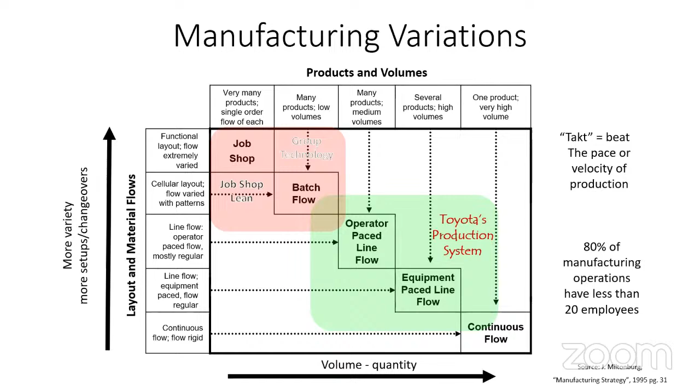Now, the other thing I want people to realize is the concept of flow actually has a fairly long history, several hundred years, actually. And in the beginning, we begin to do rationalization, where you work on trying to smooth the flow or simplify the process of individual processes. And over time, they begin to think about the whole factory as a machine itself.

And even recently, you think about Tesla as being kind of an innovator, especially even in their car manufacturing. And there's a nice little video of Elon Musk talking, and it's like 4 or 5 years ago when they were doing the Model 3 production, and he called it his production hell, where he was sleeping on the shop floor,

and he had kind of an epiphany about the difficulty of basically creating the machine that makes the machine, but he saw the possibilities of improvement, or the opportunity was just so much greater, and he was thinking that his capability was maybe in the 2 to 3% range of what was possible.

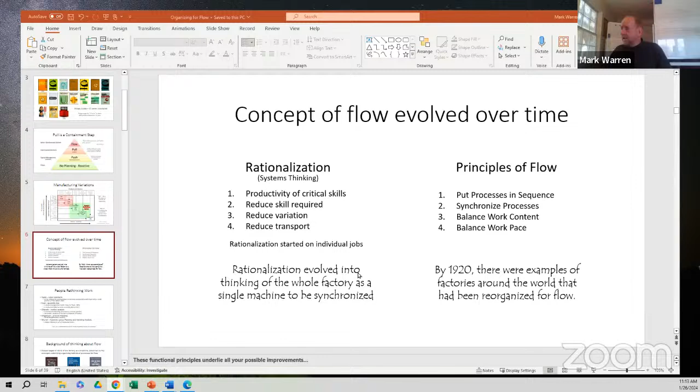There's always one, isn't there? Okay, let me just try to get that muted. Yeah, mute all except Mark. Hey, Mark, you're muted. Can you unmute your microphone? Trying to get Mark unmuted. Are you good, Mark? Great. Everybody else is muted. Can you see there how to unmute yourself? Yep. I can hear you. Right. That's good. Can everybody hear me? Okay. Yeah. Okay. So go back to the presentation mode.

So by the turn of the century, people begin to understand about flow, and there are 4 primary principles of flow, and everything in lean, everything you do toward creating flow follows one of these principles or all of the principles. So that can be a whole discussion altogether.

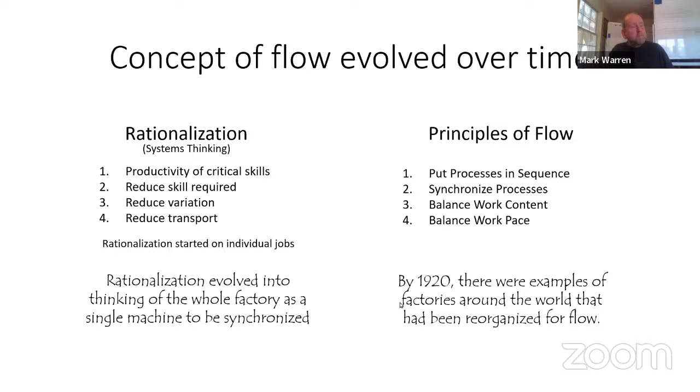But I think people want more than just philosophy. Yeah, we do. Give us some non-philosophy. We like some, but not too much, Mark. Okay.

So the other piece would be, and I'm thinking about the things that I read about Shingo and Ohno, and they talked about there was a time in their practice of work that they had kind of an epiphany, they started thinking about work differently. And not only they started thinking about work differently, but the people that they drew on to copy also had this same sort of epiphany.

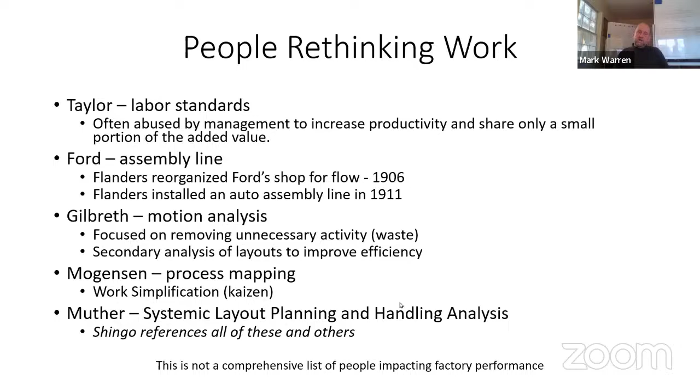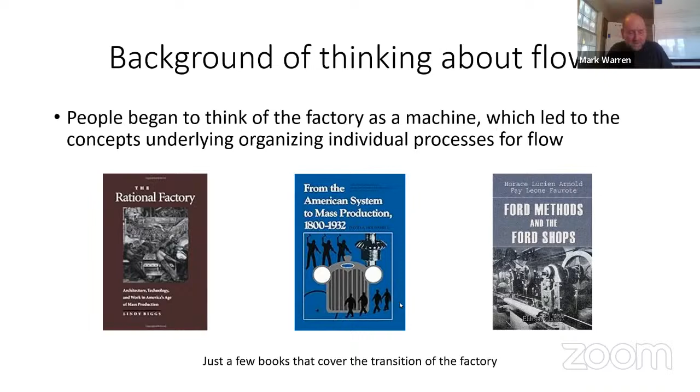And I think a lot of people, when you transition into like the 2-second lean and like your improvement starts with I, it really requires you to make a thinking change about how you do things. And if anybody wants a list of stuff about some of the history about some of this thinking, here's a list of books. I can skip over that. Just send me a note. Now, the interesting piece is I want to try to kill the one-piece flow moniker.

I've fought against it for 20 years, and finally, because I've gotten into all of Shingo's books and realized kind of where the source is and his discussions, we only have a little piece of the story behind it. It's not just one piece as an ideal for the flow part. Also, he wanted transportation to be 0. He wanted the cycle time to get as close to 0. He wanted delay, like the intermediate stock, to be 0.

He wanted work in process to be as close to 1 as possible, or as close to 1 as effective given the processes. And the critical piece was synchronization. And he talks about getting rid of the delays. And he calls delays stagnation, which makes you think of things differently. And by the way, the inspection cycle, like his zero QC, you want the inspection of the poka-yoke to be inside the value adding time as much as possible. So he talks a lot about thinking about space and time.

So Mark, I'll play the dumb guy, it's easy for me. So one-piece flow, you're saying here that it's got overemphasized over all the other goals that he had. So people obsess about one-piece flow, we've all seen it, and he had these multiple goals.

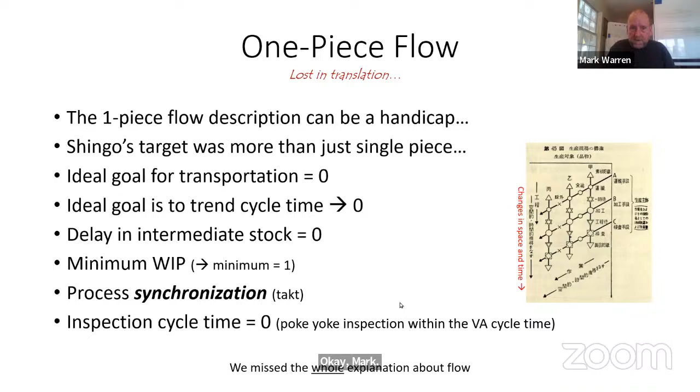So the next thing I want people to think about is there are levels of granularity. It's not only levels of granularity, but iterative. So I want to start out looking at a fairly high level and then work my way down. This one I was using as an example in a company I was working with in Asia.

Mark, I'm going to ask you to go back a step. Again, I'm doing this in the spirit of giving everybody a rounded understanding. So most of us on the call are 2-second lean people from our emphasis.

This is really what I'm getting from that slide, is that the systems thinking is at the other end of that. This is where we're looking at the whole system, and we have different views, where most of us are down at the very essence of 2-second lean in itself. And if it's dogmatically applied, you're looking at smaller ways, many subsystem, little improvements in 2 seconds, whereas this is the whole spectrum.

Yep. So I want you to kind of look at a high level and then work your way down. You can basically spend a ton of time making all these little improvements. It may fix what bugs you, may not, but the other piece is, since most of the people are probably working with smaller companies, and I can give you some statistics, in the US, 80% of manufacturing operations have less than 20 people. In Europe, it's like 90% have less than 20 people.

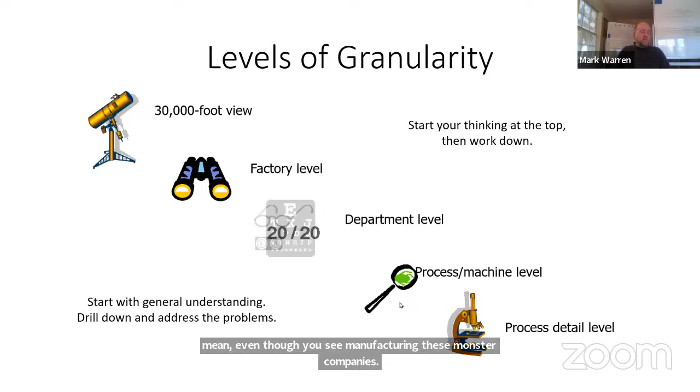Even though you see manufacturing of these monster companies, what do the small shops do? Well, you can use some of the tools that Toyota used, but it's not as effective as you think. Mhm. It's really difficult. Okay. This is super interesting.

Okay. So I want you to think about, you need to get into your mind, at a high level, from your supplier, inside your factory and then your customers. I want you to look at, what are the barriers? And I'll get into that a little bit as well, but you can look at the high level, and then we can keep going down.

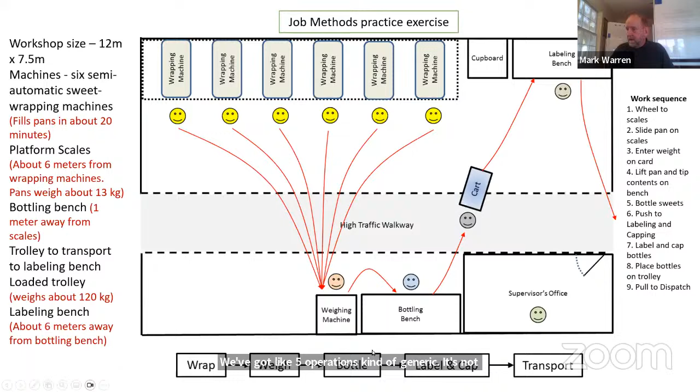So ideally, what you want to do is in your very first pass, well, let me go back up. Just like this, we've got like 5 operations, kind of generic. It's not detailed, it's just generic. We want to dig down. So which one's problematic? And I'm going to tell you, if you can't clearly see, or if you bring a visitor in and they cannot clearly see what the sequence is, it's so disorganized, then yeah, you really need to do a lot of 4S'ing.

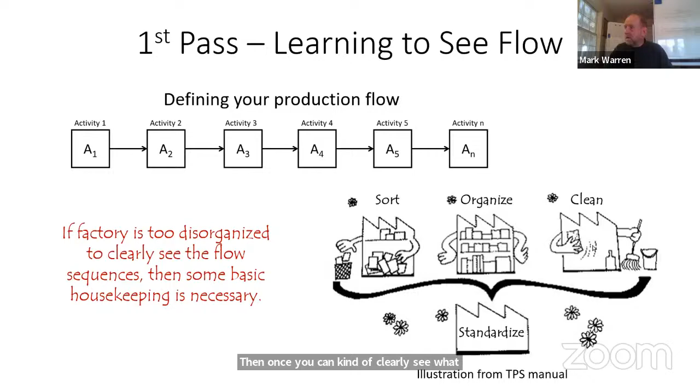And actually the 4S came out of the job methods in TWI, is you need to get organized a little bit, just enough to basically get your act together. But once you can kind of clearly see what the sequence is, and maybe you do a little bit of moving around, I want you to go back and walk through those same pieces and list all of the problems that you have. What kind of activity, what kind of rework, machine malfunctions, bottlenecks. Once you identify your barriers, these disruptions are what actually eats up more time.

And one of the observations I just stumbled on the other night, I was reading some of Shingo's stuff, is he talked about the improvements, that you gain more from removing the barriers than you did from actually fixing a process. Can you dive into that a bit more? You get more from removing the barriers than fixing the process. Okay. So, well, maybe I need to retract the fixing the process. So if I have a high rework rate, yeah. I actually think I get you.

So if you've got a part of your process that's giving you 10% reject, that's a barrier. Taking that barrier out, automatically your throughput's going up at least 10% because you've got rid of that. So it's an easy place to focus. Yep. And sometimes I've gone into places with high volume automatic machinery, you'll have the machine at a fairly rapid cycle time, and the machine will cycle and there won't be a product in there. So you have missed cycle times.

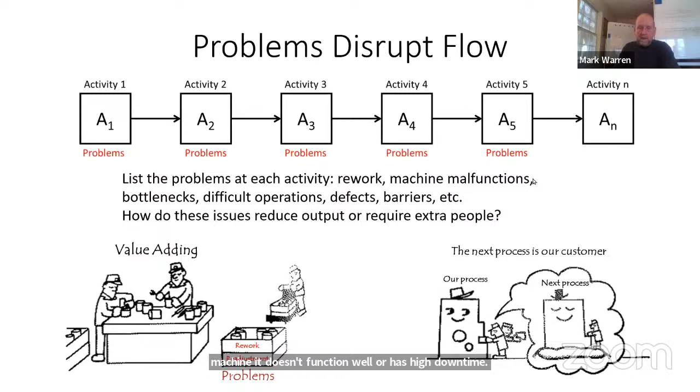The next piece is I start looking at unnecessary activities. A lot of people think about waste, and I'll give a little thing. Originally there were only 4 wastes listed. It was much later in the process that they got up to 7 wastes, but originally it was only 4. And he quantified them because people were having a difficult time identifying true disruptions that could be fixed. A waste is really an unnecessary activity that we're doing that we want to remove. And so that's our goal, to try to remove the unnecessary activity.

They've used this illustration several times. A lot of times I'll ask people, how many times do you touch it? How many times do you pick it up, put it down, pick it up, put it down? One of the pieces inside flow is I would pick 2 processes to start with that have about the same rate, and I want to make sure those machines are as close together as possible. The operator, as soon as they finish that operation, sets it down or puts it into the fixture for the next operator. So you're beginning to synchronize 2 operations, so you don't touch it numbers of times.

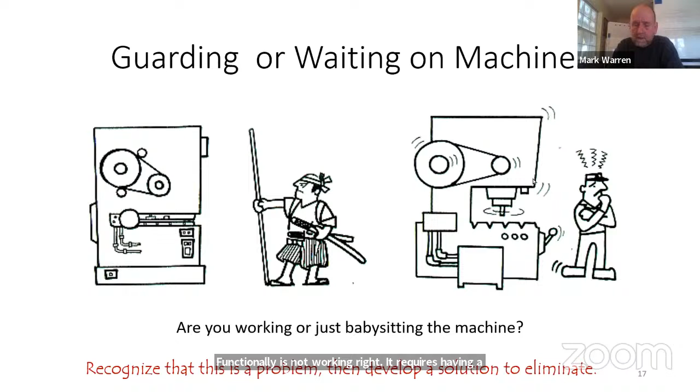So once I've got the process sequence, then I want to talk about velocity. And I want to challenge you, please don't try to do time studies. Don't get out a stopwatch. The first pass, go ask your operators. It depends on your product: so many pounds per hour, so many pieces per hour, so many pieces per day. But what you want is just an approximate value.

And the reason I don't want you to get out a stopwatch, there are some psychological reasons; people feel like you're challenging them. But you want to be doing the improvements so rapidly. In the early phases, you can do improvements so rapidly that you're wasting your time trying to document an accurate time study.

If it's a fairly short cycle time, go out there and get your watch out if you want, and just count, like, 10 pieces. How long does it take? Well, it takes about this. And as you're observing those 10 pieces, do some seem to take longer than others? That makes you go iteratively back into problem solving. Why is one taking much longer than another?

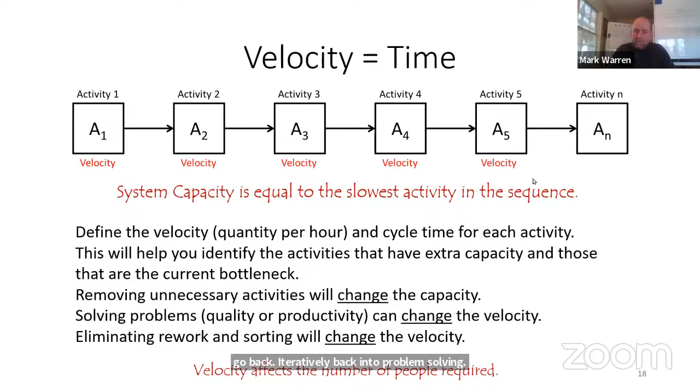So here's an example I had from when I was doing a project over in Asia with some IE students at a company.

I had them go out and do the same thing. Follow 10 pieces, tell me how many pieces per hour is the capacity of that particular station on the line. And they came back and they were like, okay, so this one can do, I can't quite read how many, 100 per hour. And we put the target, basically the takt rate was this, the little dotted line. I'm not sure if you can see this or not.

Yeah, we can. We could say, okay, so what are we going to focus on? And it became really obvious that I had overcapacity here, overcapacity there. Here's a couple that are under capacity, that one. So I've got 3 that are under capacity. So once I do that, I've identified those 3 are basically my bottleneck or weak spots of meeting production demand.

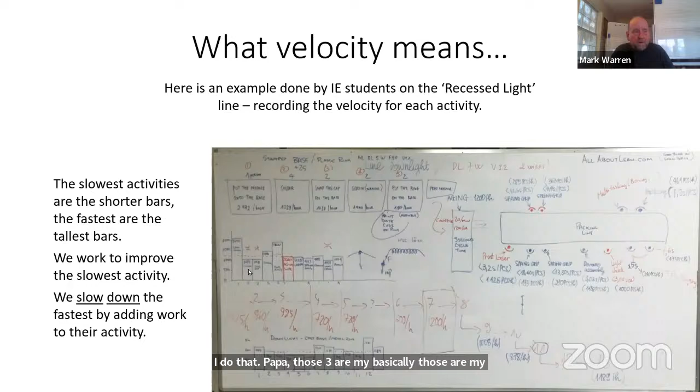And I went back, okay, so what am I trying to improve? Where I'm trying to find where the holes are and what am I going to fix? As an engineer, I want to be really smart and creative, and I want to invent something really new. And you have to put that on the back seat. If you look at it, generally the value adding part is a very small percentage of the total time. Toyota says maybe 2 or 3% of their total time in the car is value adding. Even Toyota. Mind blowing. Yep. So let's work on the really easy stuff first before we try to get into the more complex pieces.

And if somebody has a difficulty in picking out what an activity is, you're focusing on just the work, but you also have, what are you doing to get ready? What are you doing on the checking process? What do I have to do on the cleanup? The get ready and the cleanup is really big in the food industry and pharmaceutical industries. Some of the other delays that you can have are right over in here, just a difficult movement, having to walk. And when I'm looking at layouts, I usually don't try to get accurate measurements. All I do is, okay, how many steps do I take from process A to process B? Let's make it really simple, really easy.

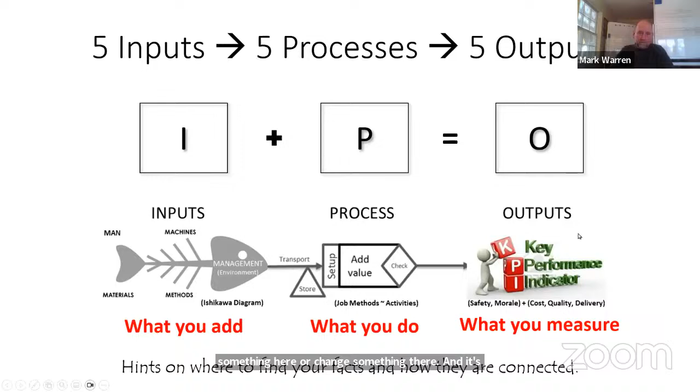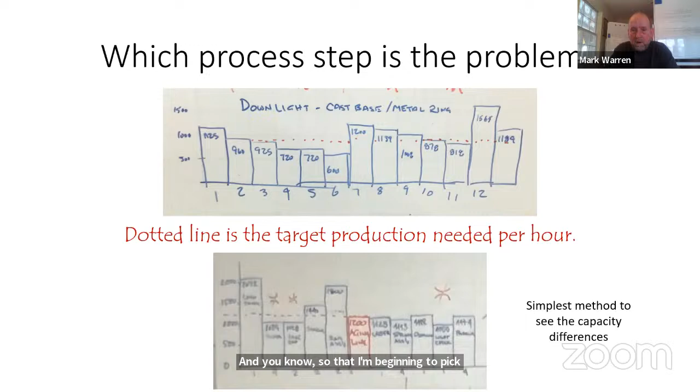So here's the students again. This is a little bit more detail about what they did. So the first thing is I'm defining really what the work is to a good detail. Then I'm coming back and I'm defining what process step is the problem. And so then I'm beginning to pick out which one I want to solve. Which one should I work on first? Then I also can look at work in process.

So for me, red flags are operators being able to stack up work ahead of the next operator because they are so much faster. I mean, that's a giveaway. Or another operator struggling, sweating to try to keep up, which is, we think about the Muri, and it's the last one. It's the unreasonable thing of having a person struggle to keep up. That's where Ohno started first. He didn't start with the waste. He started with the unreasonable activity first.

So I'm looking at not only the volume that you have stacked in between, and I think of intermediate inventory as insurance. People put insurance or buffers inside an area because they know they have lots of variation. They know they're trying to basically hide barriers or problems in the process.

I love that, by the way. That was a real moment. Ohno didn't look for waste. He looked first for unreasonable activity. Yep. That is so cool. It's like basically look for struggle. Yeah. So if you look for struggle, you think about respect for people. You don't want to put that struggle, unreasonable safety risk, on the operator. If you do that first, then things will be very, very quick.

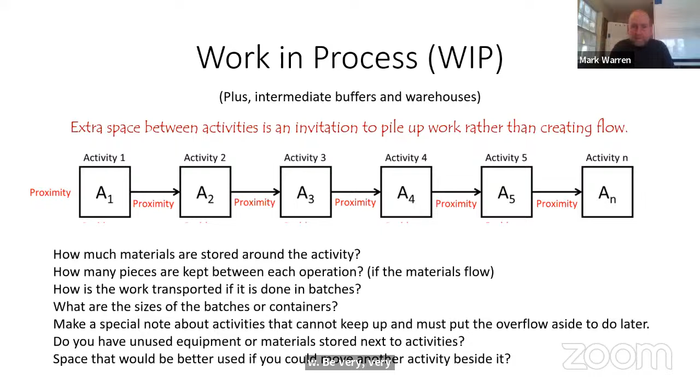So once you've understood it, then you can challenge it. A lot of people really like this as a good challenge piece. So once you clearly understand all the pieces, then you can say, okay, how do I challenge it? This is where your Kaizen, your improvement piece comes in.

Tell people, don't focus on speeding up the process. I mean, you get all sorts of enmity. When I go into bigger companies, that's always been the fear, what they call work intensification: I'm going to force people to work harder, faster, no breaks. This is a complaint inside Amazon, that they're basically working people to death.

So I want you to focus on removing the quality problems, sorting, rework, adjustments, remove non-value added materials. Is it necessary? Challenge it. What's the purpose? It's easier to remove something than it is to improve it. Then I want you to count the number of times you pick it up. Then focus on trying to make it easy for the operator.

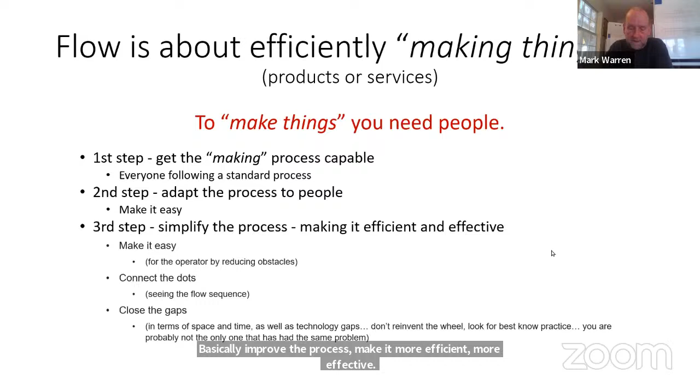Let me go back and talk a little bit about Shingo again. If anybody's read any of his books, they regularly see this little matrix that he has. He's been trying to discuss this since the 1950s. He talks about organizing things in space and time. The space is the footprint of the operation, and the time is the actual cycle times. And you're trying to smooth things out. So if you would do a 2% target, not the 2-second lean, but 2%, think about what one thing can I do in the system to improve 2% productivity each week, you'll achieve roughly a 3 times improvement in a year.

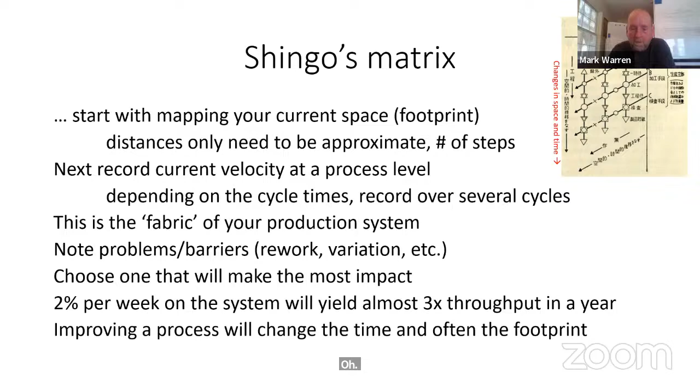So, Tom, do you want me to go over some of the principles? Well, is that what you were planning to present, Mark? Yeah, pretty much. I'm wanting questions because I can talk through the principles of flow. I love this. I think you've done a great job of outlining your thought process and how you approach understanding flow. We talked about how to improve flow. You first of all have to understand it, as you've really clearly laid out, and then what your thought process is towards getting it better.

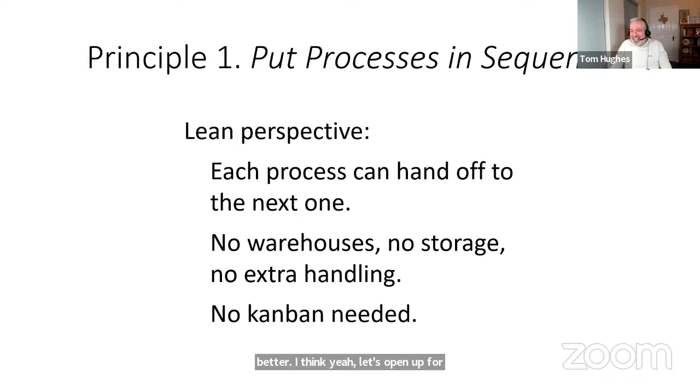I think, yeah, let's open up for questions. We're going to unmute all. Let's see how that goes. Okay, you can all unmute yourselves if you have a question. We had one question, I think it was from Nicholas. We'll open it up to the floor first, but we definitely won't forget Nicholas's question. Okay. Go ahead, guys. Ask me. I know I've kind of dumped on you a little bit.

I can tell you stories where we doubled production in 90 days or less. I'm mostly interested, because I think most of the people on the call are coming from high mix, low volume environments, in hearing anecdotes and stories from that environment. Do you want to shed some light on that? Okay.

Well, the first piece is you do the high level flow. You look at what some of the barriers are. You look at where some of the high variation in the processes is. Sometimes it's distance. Sometimes it's overproduction in one area, waiting and starvation in another area. Some of it, we end up putting carts.

So in Canada, there was a small operation. I'm trying to remember, gosh, this has been 20 years ago. They made fuel tanks. They made the fancy extra fuel tanks for the trucks. You see the big polished aluminum fuel tanks on trucks going down the road that hold a couple of 100 gallons. So they made aluminum fuel tanks.

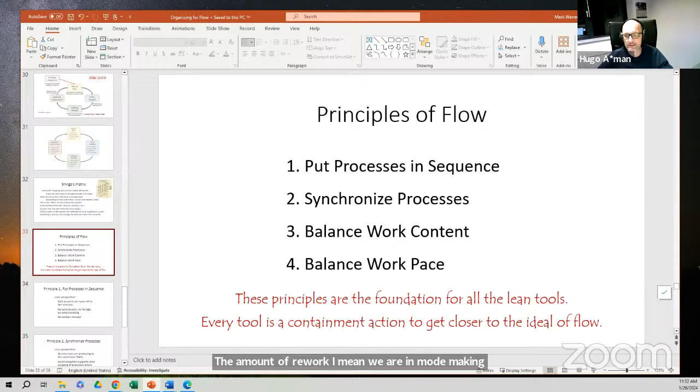I just want to support Mark on the thing he said about quality. I have experience in my company that last year I decided that we should focus just on quality, and the result is amazing. The amount of rework... we are in the mold making business, and we are doing everything in hundredths, really precise and so on.

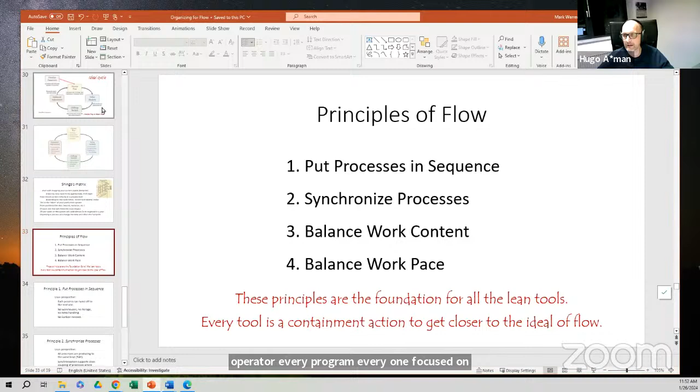We really did a really good job last year, just focusing on quality. So every operator, every programmer, everyone focused on checking their own work. This was a really good result. Yes, that's all. Any others? Thank you, Hugo.

So I can give an example. I don't know if any of you track OEE. Used to, long time ago. Overall equipment effectiveness, for those who aren't aware. So a light bulb production line, where they run basically two parallel lines, has roughly a 3-second cycle time. Their typical production was 8 to 10,000 pieces a day.

We started with job instruction to analyze exactly what each operator was doing. And we even used it on the automation to basically problem solve and figure out what the automation was doing. We increased the OEE to 98 to 99% and went to roughly 20,000 pieces a day. Now, world class is about 80% OEE, and they went far beyond that. It took them over a year, but it's 1,000 little improvements that did that.

I can talk about a smaller shop. There's a suggestion from Drew Dolphing: Mark, you instructed us to move our more intricate molds away from our less intricate mold line, telling a story about door and window manufacturing. This has been a big improvement for us, and I think the group would benefit from hearing about it. Do you want to let us know about that one?